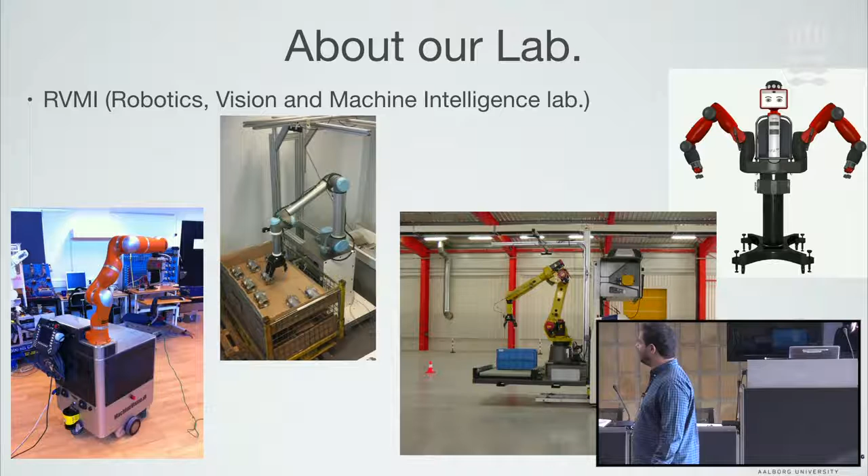That's how our lab looks like pretty much. We have some robots on wheels that we call mobile manipulators. We have some robots on fixed bases. Robots on bigger wheels. That's a robot we are building for Peugeot Citroën, and that's actually a demo that has been performed in their premises in France, in Rennes. And that's also another robot that we have, a dual-arm robot called Baxter.

Our expertise as a lab is on visual sensing and perception. We are doing a lot of research about industrial robots. Drones and aerial manipulation is a topic we are active in, and we are looking forward to continue being active. This is probably the topic that interests this audience most. And I think that the last bullet should be also a topic that would be of interest for this audience, even if I'm not sure if this audience is aware of it.

So in robotics and computer science in general, a lot of discussion is done lately about machine learning and artificial intelligence, and how can we exploit these theoretical concepts up to some 5 or 10 years ago into practical applications. How can we exploit the possibilities opened by machine learning for solving real-world problems, other than playing chess or Go against the human player. And I'll come back to that.

So I start with a question. Does it make sense to use robots for structural health monitoring? And I'm trying to motivate myself and motivate you to follow my talk. So obviously there should be some good reasons for using robots when it comes to structural health monitoring. I'm quoting something that was said in the European Robotics Forum in 2016. So it was roboticists talking to roboticists, and there it was said that working in height is one of the top 3 reasons for fatal accidents when it comes to working environments.

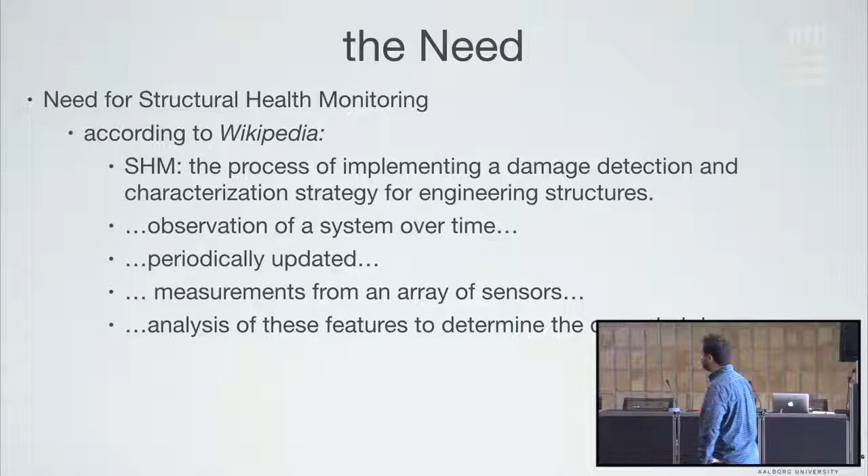So, obviously, you know better than me, and I'm not very proud of this slide, but why do we need structural health monitoring? Well, since I didn't have you next to me when I was preparing those slides, I quoted Wikipedia here that says that structural health monitoring is the process of implementing damage detection and characterization strategy for engineering structures.

We need to observe the system over time. We need to periodically update our observations. We ideally can use multiple sensors and get measurements of different quantities. And we need to analyze those features to determine what is the current state. One step ahead, maybe make some predictions about the future state. Is this completely wrong?

Okay, so nobody shouts or nobody. Okay, good. So, thumbs up for Wikipedia.

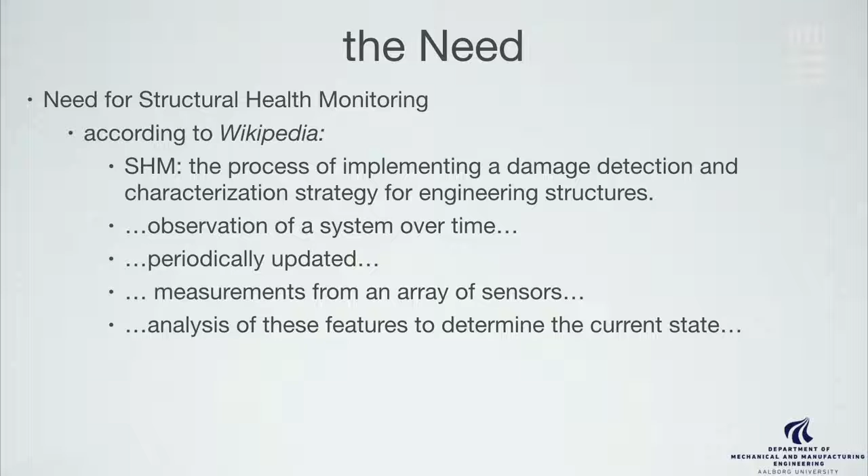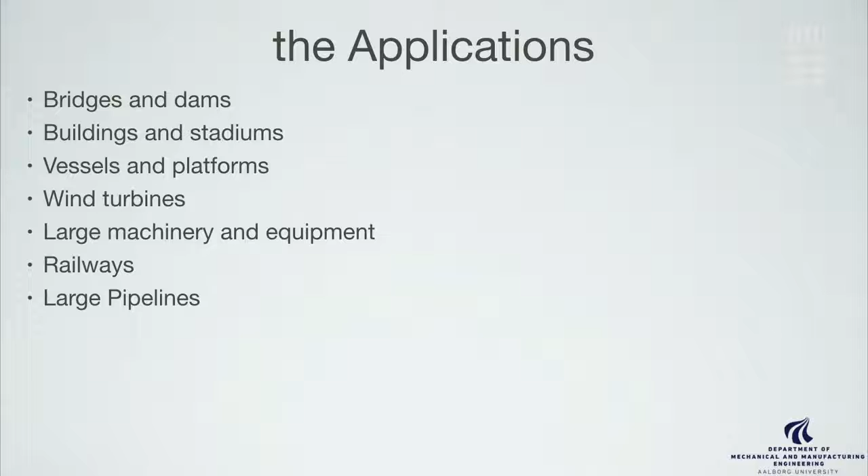So, having those in mind, one can imagine many applications. And again, you are the experts here: bridges and dams. I've seen robots being deployed. I've seen drones being deployed in bridges and dams, buildings and stadiums, vessels and platforms. A lot is done in the oil and gas industry.

Wind turbines is a hot topic, especially in Denmark, as Denmark is the world leader or one of the world leaders when it comes to wind turbines, both onshore and offshore. Inspection of them, aerial inspection for the upper part, underwater inspection when it comes to offshore turbines.

Large machinery and equipment. Our good colleagues in Odense at SDU are deploying drones for rail inspection in collaboration with the Danish railway operator, DSB. And large pipelines are also something of interest as more and more pipes are extending from Russia to Europe and in other places.

The topics that I'm going to cover are these. I'm going to talk a little bit about robots. I'm going to talk a little bit about the sensors that we roboticists are usually working with, and I have a non-exhaustive list of sensors or sensing technologies that I will touch upon. And again, these are coming from the perspective of a roboticist. There should be better sensors that you know that we could put on our robots.

I will try to review what has been recently funded by the European Commission when it comes to the merge of robotics and structural health monitoring, and talk a little bit about the possibilities opened by the state-of-the-art technologies, that is computer vision, machine learning, and something that we call aerial manipulation. And then we conclude, and hopefully we discuss all together. So that's the plan.

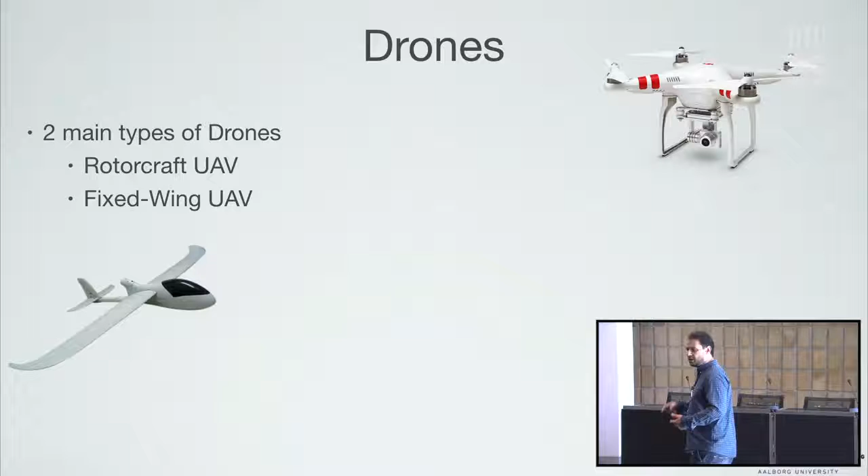So usually, when it comes to monitoring of structures, we are dealing with this, because if we find something interesting, we can just spend some more time with it. While here, you have probably already moved along the moment you realize that was interesting. So maybe you need to schedule it on the next pass. But here we have this luxury. And so focusing on this, there are different kinds of drones.

You can have something that is fully teleoperated, and it's not that much different from the little helicopter I had as a teenager, where you have full control, even if not on board. You have a human who has full control of what the drone is doing. So a lot of human involvement down here. And you can have almost zero, ideally zero, human involvement up there, where you have fully autonomous operation. So you just deploy it, and then you pray to God that it comes back with something sensible. And it depends on the algorithms that run on the drone that something sensible is returned.

And from my perspective, you cannot achieve this ideal situation of zero human involvement without any artificial intelligence. So you need to have some tricks to discern what is interesting and what is not. While here, you can have a real-time feed of a video stream, and the drone can be the human's eyes, right? And the operator, or an expert next to the operator, can tell what is happening.

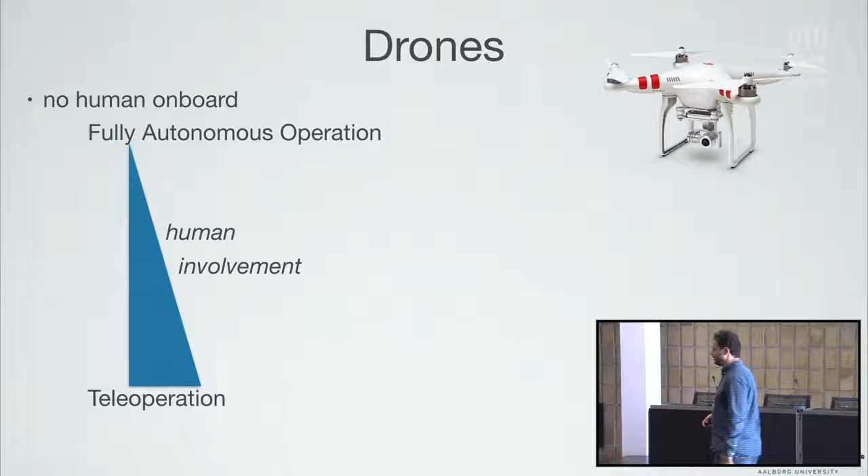When it comes to drones, some typical specs can be that we can have an autonomy of up to 1 hour. Those figures are indicative. It depends. You can have small drones, you can have big drones, you can have a lot of payload, little payload. But we can typically promise 1 hour of autonomous operation between charges. And that's something we are currently, as a community, struggling to solve. It's not ideal in many cases, but there are ways of dealing with it. There are ideas of, whenever we submit a proposal and it has to do with drones, you always expect the feedback from the reviewer that, okay, and what happens?

It will make a nice demo, I agree. What happens in real conditions? What will happen if you want this to operate 24/7 or for an 8-hour shift? Of course, our colleagues who develop batteries increase their capacities every year, but that's probably not enough. So what we do is we deploy multiple robots, and while one robot is operating, the other one is charging, and then the shifts switch, and if you have a couple of them, you can always ensure that you have one operating.

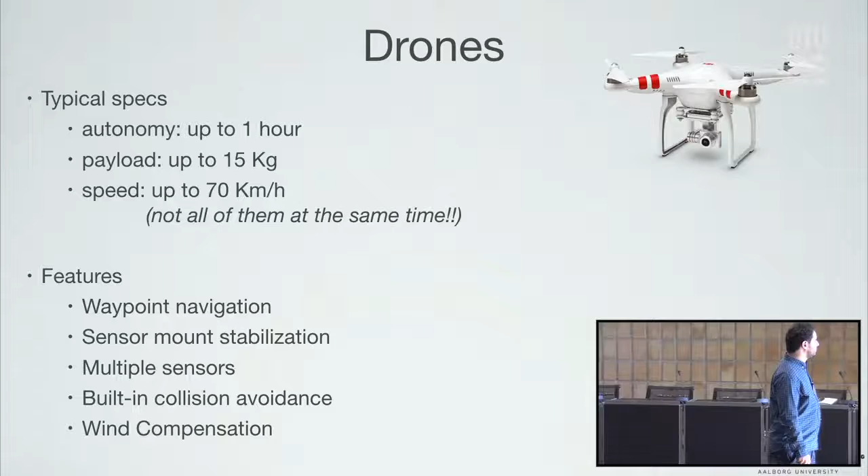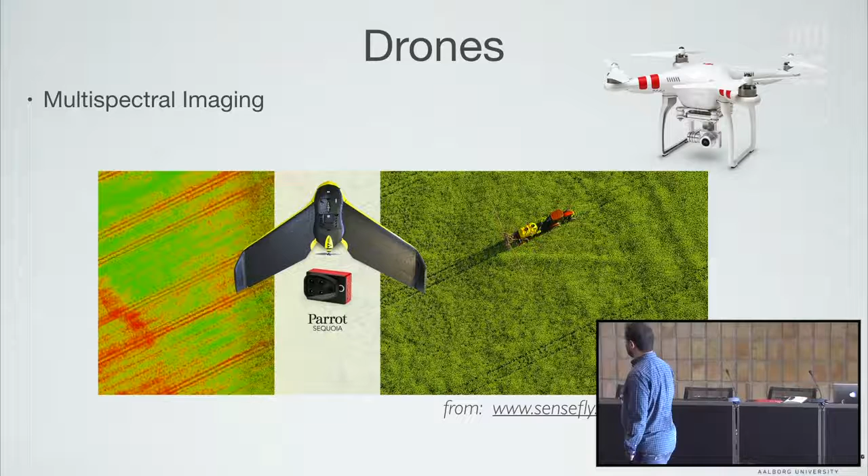Drones for inspection usually have protection here around the rotors. They can have multiple cameras, for example, one for the inspection itself and one for navigation. The robot needs to observe the environment in order to autonomously move in it. But the operator is not interested in the environment. The operator might be interested in the floor here, right? So you need two cameras, one or a couple for the robot to localize and navigate, and the real sensors that are useful for you that will get the measurements.

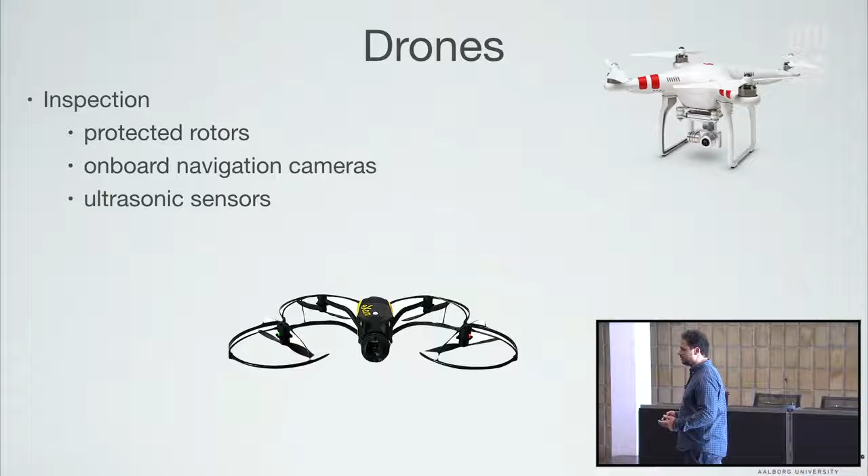And ultrasonic sensors are an old but still very popular technology here. Something that is quite fresh: some PhD students from EPFL in Lausanne, Switzerland, had this idea to put a drone within a bubble-like frame just to protect it.

And the idea is that when it comes to drones, I have already mentioned 2 or 3 times that you don't want your drone to hit the wall. You have collision avoidance. You're trying hard to compensate wind, any disturbance, not to hit the wall. Maybe in some cases, it's actually not that bad an idea to hit the wall.

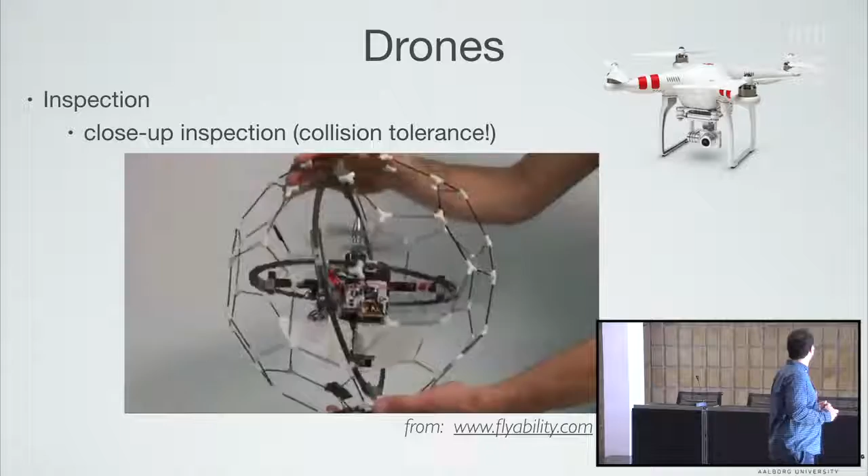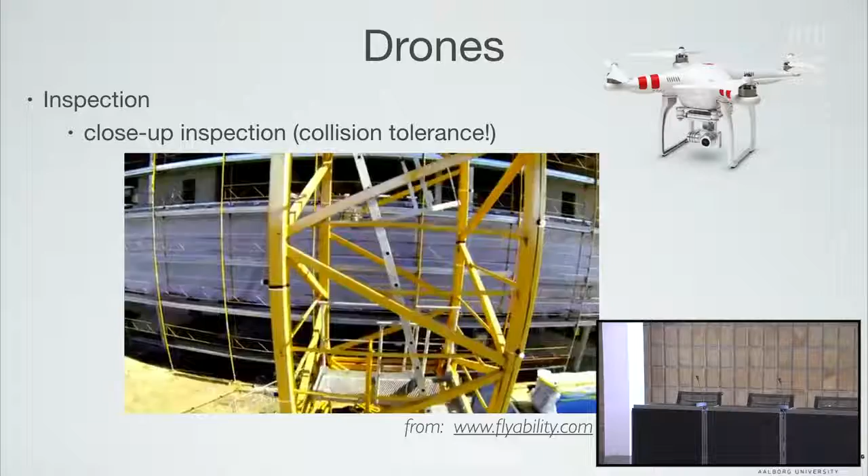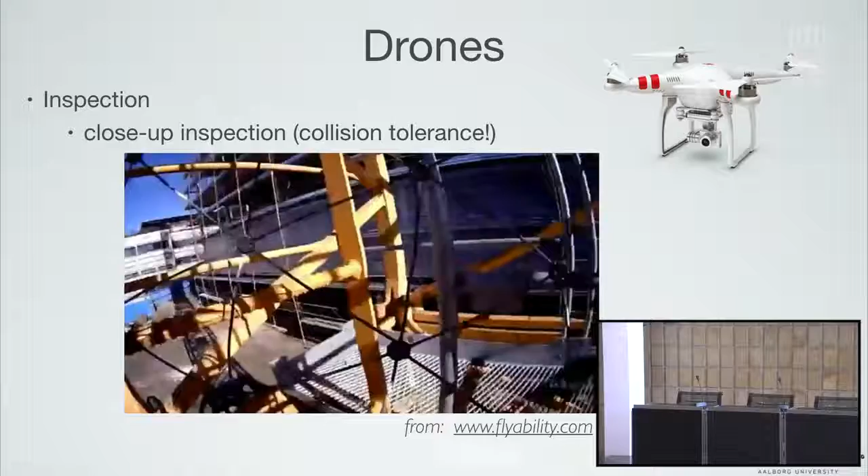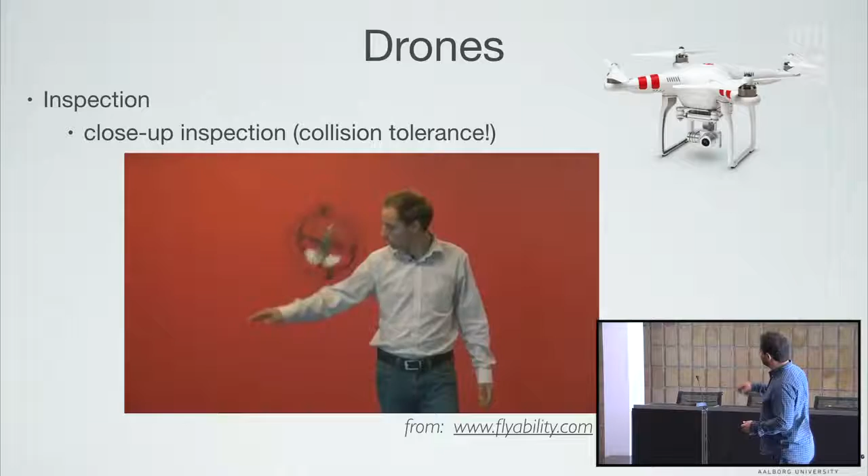So in order to get close-up inspection, you can have those gimbals that stabilize the drone inside, no matter how the bubble-like frame on the outside looks. And then you can have a drone that does something interesting like this, where you actually want it to hit the environment in order to have as close a view as possible. So in this pipe, such a tight pipe, it's kind of difficult to ensure no contact, but that's kind of cool.

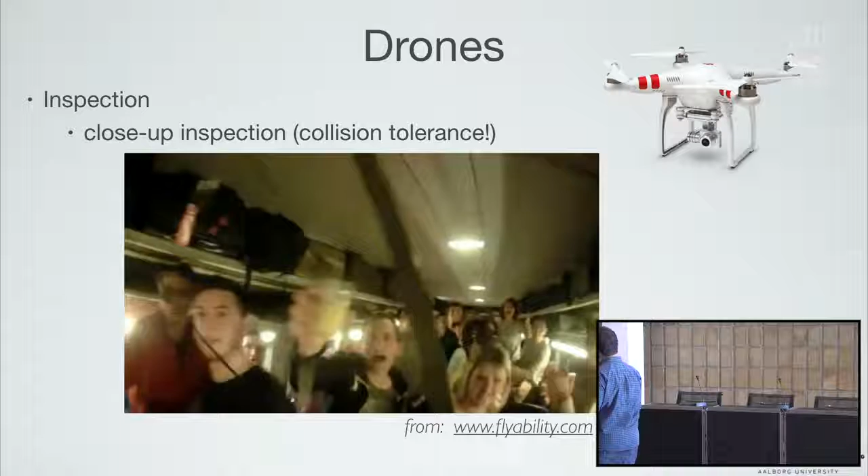So one can imagine other simple modifications to the basic concepts that take us one step or half step out of the box that can have very interesting applications. So pipe inspection is one of them here. So I'll now briefly talk about mobile robots and stop talking about drones. So a mobile robot looks like that. It's something that looks like a car or an autonomous car plus one manipulator on it.

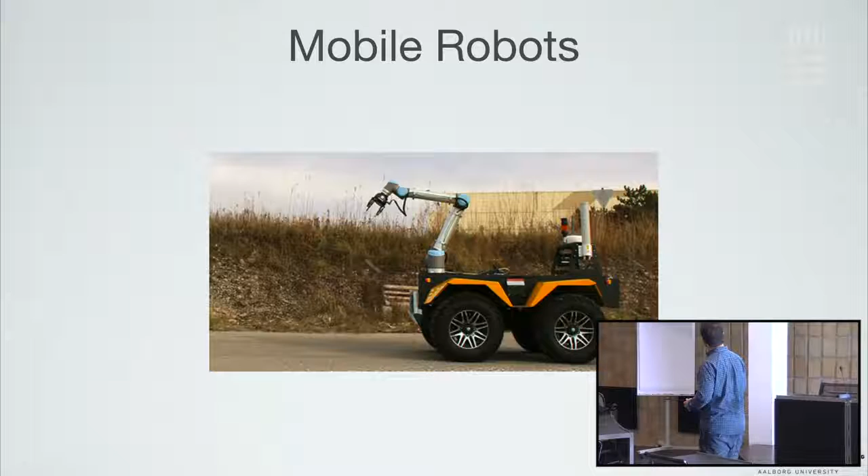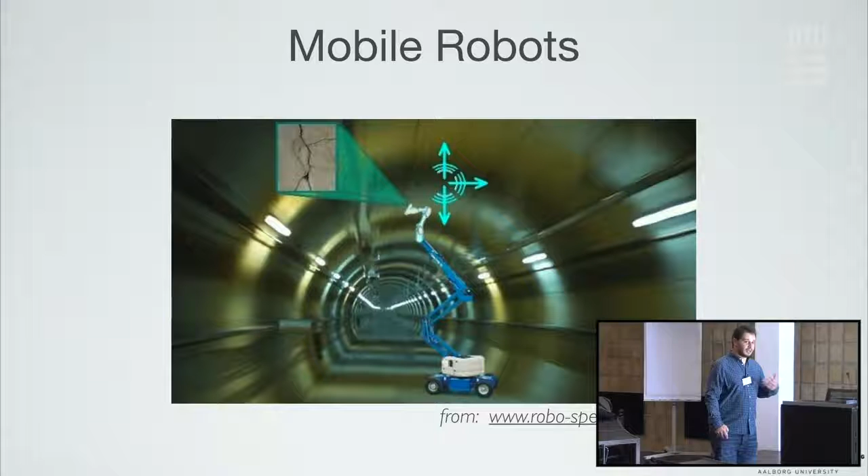And people in the inspection community have used such solutions. So that's the steroids version of this, I guess, where you have something bigger. You have a crane instead of a robotic arm. And then you have a robotic arm on top of that, equipped with sensors that can look for cracks in tunnels. And this is something that we have been, as a community, active in for the last decade or more, actually 2 decades.

What we can achieve is pretty similar to what I told you we can achieve with drones. Of course, the height is limited. But what is better with mobile robots is that we are able to manipulate stuff. Up to this point, I was telling you about drones that go and look, measure, sense. Sometimes we need to perform tactile inspection, for example, physically interact. And I had a bullet some slides ago on aerial manipulation. That's the topic that we are opening as a community that is supposed to deal with this problem.

So in order to tell if there is a crack, sometimes eyes can deceive me. I need to touch and feel and maybe combine the 2 modalities to tell for sure. And that's easy with a mobile robot. Why? Because this is statically placed there. I can brake, I can have a rigid contact, I can spend as much time as I want. Standing there, touching the wall doesn't cost me any energy, right? While ensuring that a drone is fixed on the vertical surface of a wall, ensuring good contact, constant contact, it's a little bit tricky. Again, I'll come back to that and tell you the ideas we have as a community to solve these issues.

You can have time of flight, where you just send light and then you measure how long it took, pretty much like a radar. And you have a full-blown lidar, which now works with normal laser. It's not light anymore or infrared.

Tactile sensors nowadays look like this. So we can have miniaturized ones such as these ones here. So each one of those points here on the surface gives us a reading, and then we can reconstruct. So you can have readings as dense as this frame here, and then you can reconstruct the sense of touch. And then you can do accurate stuff such as touching a tomato.

Maybe you've seen robots failing to grasp an egg some time ago, and that is a joke, right? I mean, a robot is supposed to be something intelligent. Grasping an egg, come on, how difficult can it be? Or grasping a tomato. It is very difficult. It's easier the last 2 or 3 years that we can have affordable and reliable sensors like that. That I think has to do a lot also with possibilities opened for monitoring, for structural health monitoring.

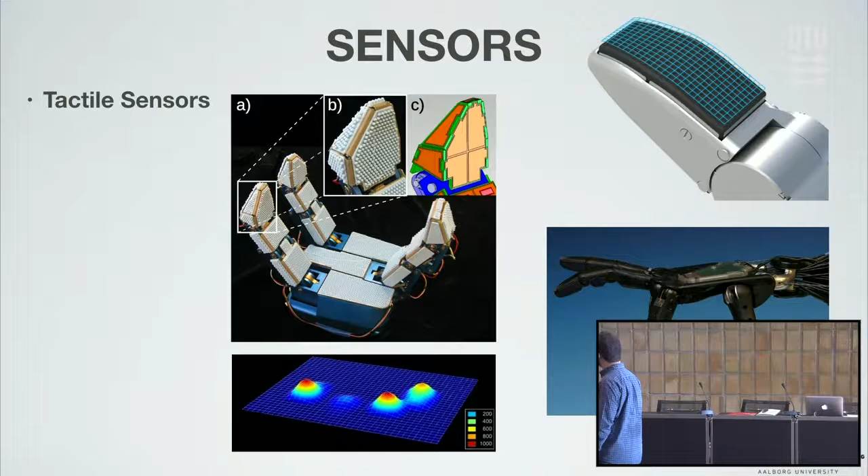Projects that have been funded. So I'm not the one opening a new topic here. Obviously, there are people who have done this already. Again, my perspective might be a little bit limited. I am a roboticist. It's very easy when I Google for something to end up on something robotics-related. And maybe if you do the same search, you end up with another list of projects. And you can see how biased I am.

So the first of those projects is called RoboSpect. It's this robot on the crane I told you about that is supposed to deliver a fully automated tunnel inspection system. This project, I think it finished like 6 months ago. I'm not sure. I haven't seen exactly what the results are. I'm not sure if they are public yet.

Another FP7 project is Petrobot, where now it's in the oil and gas industry, where it has to do with inspection of pressure vessels. So robots inside vessels doing this inspection. Obviously, having humans in a big vessel or a big tank is very expensive and very dangerous, right?

This inspection here is also quite cheap compared to how it's usually done, because otherwise you need to have ladders and put people on heights, which is both expensive and not safe.

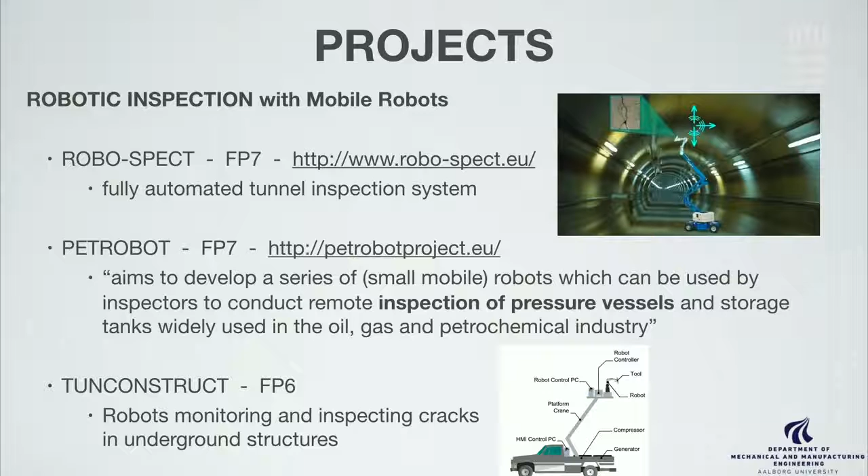Now, those were projects that had to do with mobile robots performing inspection. Let's see some projects having to do with drones that perform inspection and maintenance. This is a Horizon 2020 project. Before I was talking about FP6 and FP7; those are the funding frameworks of the European Commission. FP6 used to be some 10 years ago. It lasted for 4 or 5 years. And then we had FP7, and now instead of FP8, we call it Horizon 2020. So Horizon 2020 is the things that run right now.

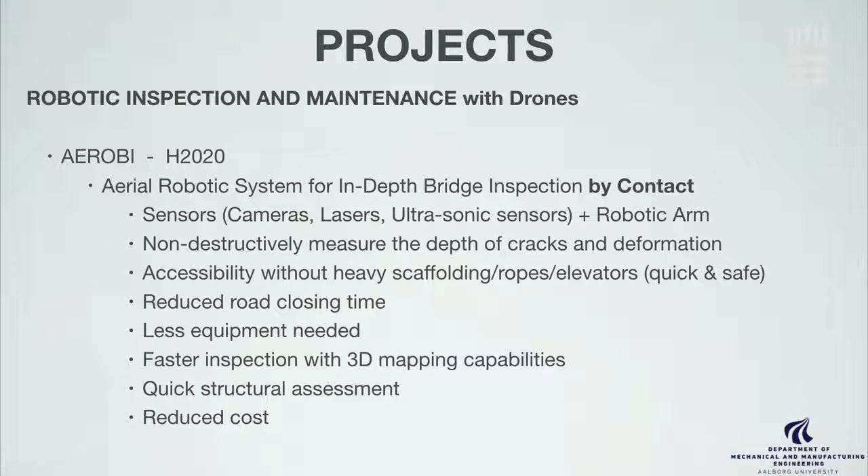AEROBI is an aerial robotic system for in-depth bridge inspection by contact. It uses a lot of sensors, robot arms. It tries to non-destructively measure the depth of cracks. And now the question comes, if you have a drone, how can you do inspection by contact?

One idea is that you put a lot of thrust and you push against the wall, ensuring good contact just by that, always having the rotors on at pretty much full speed, right? And then you're performing your inspection. But again, stability is not promised here. Maybe it moves a little bit. And you are consuming a lot of energy in order to stay statically somewhere.

There was another idea, that a robot could have 2 arms. One arm to perform the inspection by touching, and the other one for fixing itself on the environment. And of course, maybe we need to intervene a little bit on the environment and make sure that there are elements that allow the robot to find a spot to catch. Or maybe you can have vacuum suction caps; it depends on the application and the surface, right? So you can have a lot of different solutions. But the idea is this: 2 arms, one for fixing the robot, one for performing the inspection.

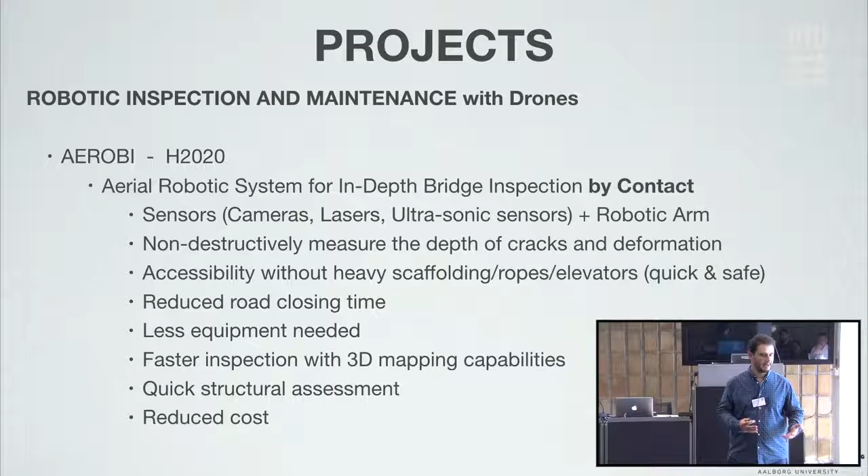And it was found that such solutions can reduce road closing time. That goes without saying. Right now, if you want to inspect a bridge, you need to close the traffic, deploy all your equipment and make sure that no car passes by. While with a drone, maybe you can inspect a large part of a bridge, for example, even with traffic, right? And there's nothing to be deployed. You just deploy the robot, nothing else.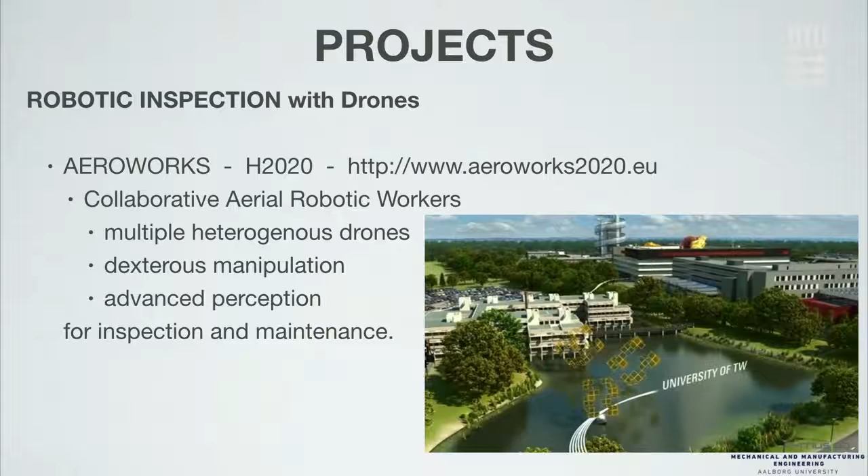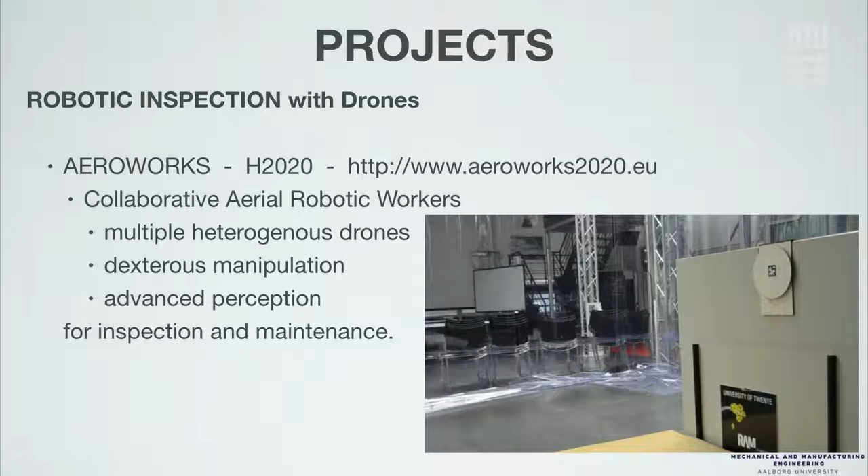And here is an idea of a colleague of mine, Matteo Fumagalli, who back then was at the University of Twente and is now with us. Now you will see a UAV hitting a wall. It's trying to hit this marker here, and it's a little bit sad, right? It goes full speed towards the marker. If it doesn't have a good understanding of where the marker is, it will just crash. Here you have a spring, and you can absorb some of the energy. And here is Matteo's idea, a spring with a locking mechanism, where you can do amazing stuff. I don't know how impressive this looks to a non-robotics person, but this is pretty interesting for us.

We as roboticists tend to rely a lot on software. If you want to hit something, then the normal way of thinking is that you need to perceive where the wall is, start decelerating as you approach it, and have a full stop at zero distance from it, ideally, right? That's how you normally do it. You are basing your actions on perception.

While here, you can do it pretty much blindly. This robot has no clue. It just knows that this is the direction it needs to go. It just locks itself when the time comes.

That is an example of how there is a lot of ground to walk when it comes to development and adaptation of robots. It's not only about software. It's not that we have the perfect platforms that can perform anything and we just need to write the correct software. Platforms themselves can evolve. And there are simple solutions that can make a platform much, much more useful.

And there is also the AeroArms Horizon 2020 project that focuses on exactly what I was telling you: on grabbing and docking and performing dexterous, accurate manipulation with another arm. An example from this project, I've seen that video but couldn't find it yesterday: there is a robot that grabs itself onto the branch of a tree, and with the other arm it has a chainsaw, and it cuts.

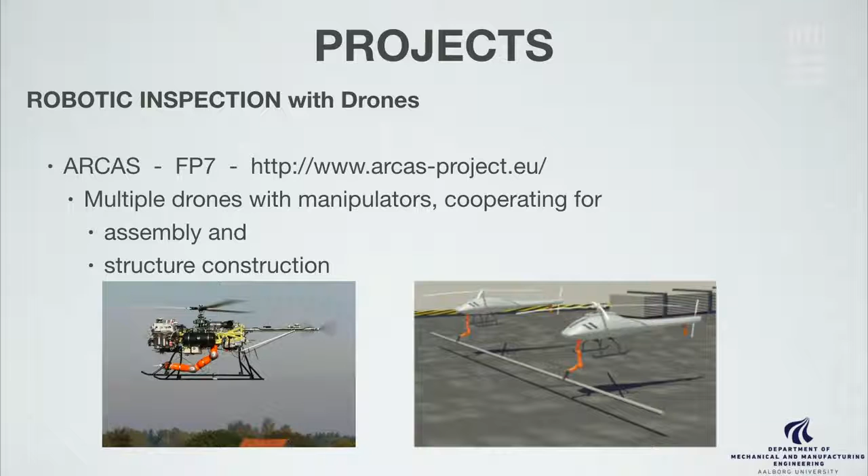This arm costs as much as a Porsche Cayenne. It costs something like 100,000 euros. And putting it on something that flies, I would be very afraid of. But that's what they did. And they were using these kinds of robots, collaborations and fleets of such robots, for assembly and construction. So those were some projects that were using robots for inspection and manipulation.

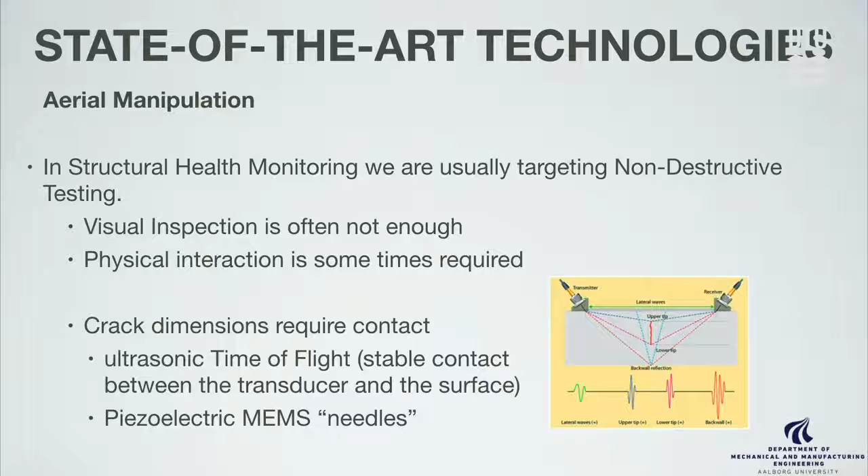A big question is, I've shown you those results of the reconstruction of that tower. Are those results reliable and reproducible? We are supposed to make science here, right? So we should have reproducibility. If our results depend heavily on external non-controlled factors, then we have a problem. We are working on that. We are improving our sensors to solve that.

Can we perform inspection in real time or fast enough? The results from the tower, they were gathered, and then they were stored somewhere. A software took care of them and built that model. That was not online. If we wanted to fix something, then we needed to come the next day, deploy another robot, and then perform the fix. If we could do this inspection in real time, then the moment something is noticed, we can fix it and then continue, which saves time and money, obviously.